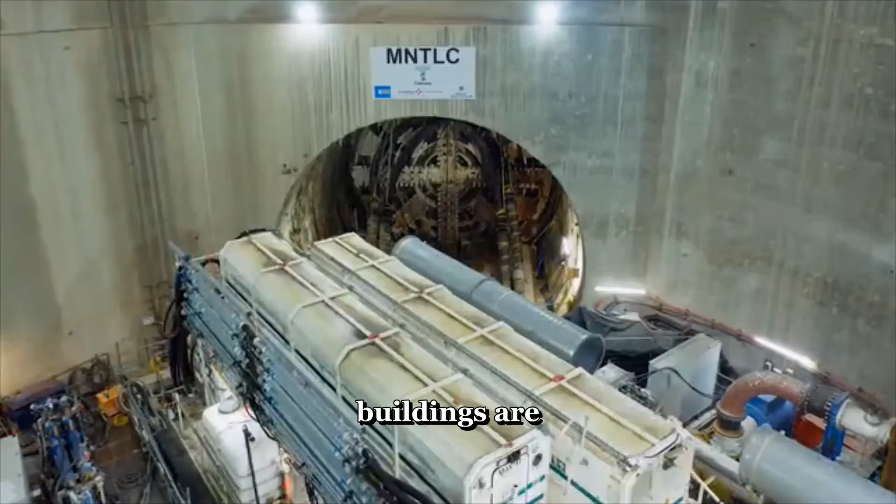Right now, 78 meters below the surface of the East China Sea, two machines the size of apartment buildings are eating their way toward each other through solid rock. They have been digging for months. One started from the mainland side, the other started from an island. They are grinding through granite, clay, and sand in complete darkness, under water pressure strong enough to crush a car, guided by satellites orbiting 20,000 kilometers above their heads.

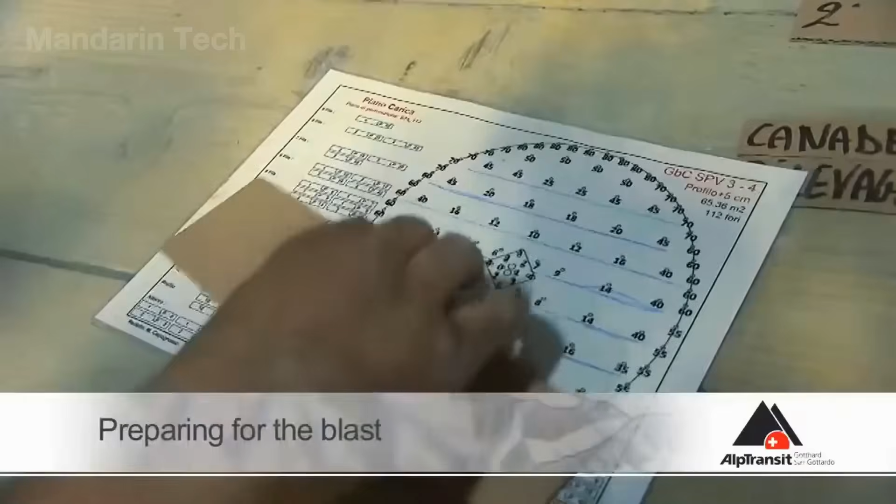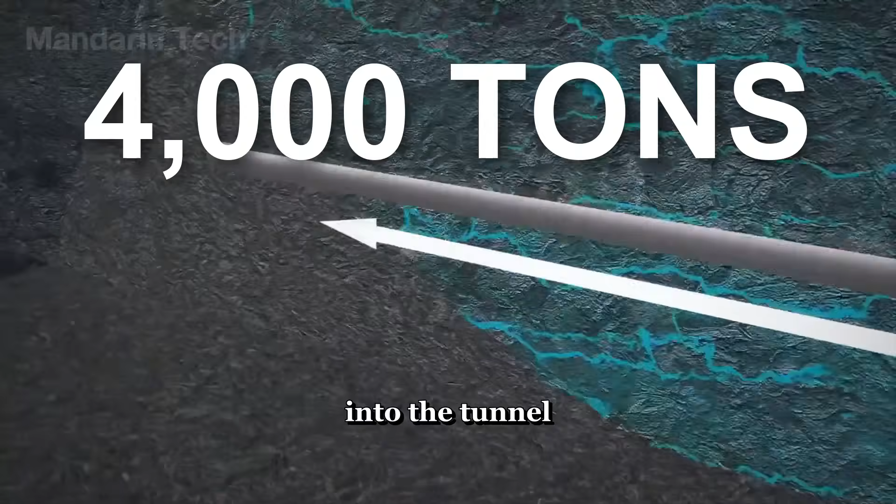When they meet somewhere in the middle, deep under the ocean floor, engineers will celebrate. And then they will do something that sounds insane. They will take the machines apart from the inside, remove every component they can carry, and leave the rest down there, forever. The outer shells of these 4,000-ton machines will be sealed into the tunnel walls. They will never be brought back to the surface. They will never be used again.

They will sit under the ocean for 100 years, holding back the weight of the sea, becoming a permanent part of the structure they built. Two machines sent down to do a job they cannot come back from. That is not a metaphor. That is the engineering plan.

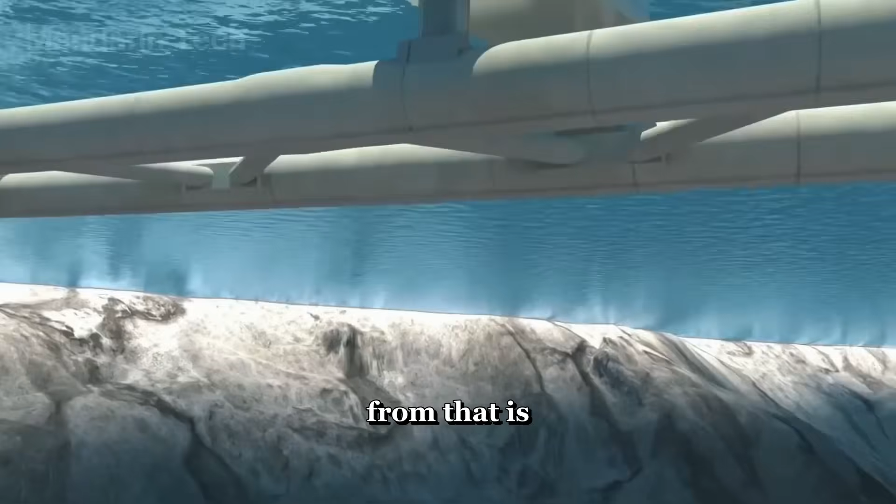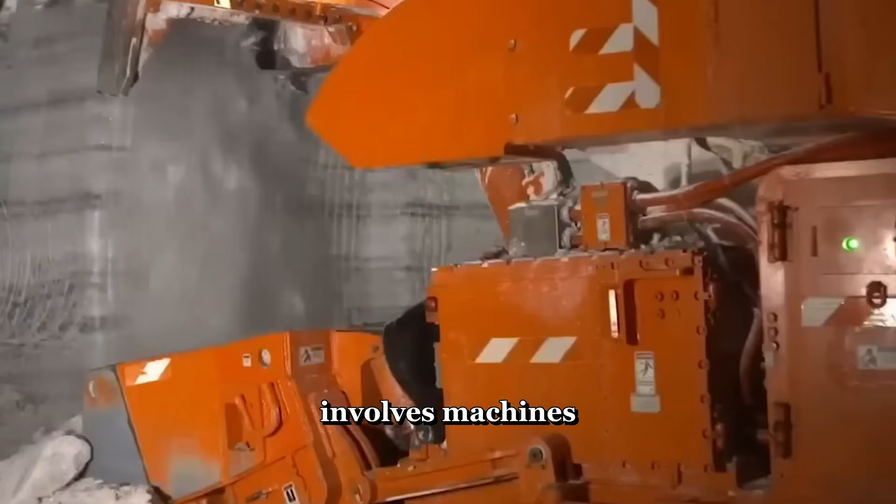This story involves machines that eat rock, satellites in space, and a meeting point so precise it would make a brain surgeon nervous. To understand why China is building a high-speed rail tunnel under the ocean, you need to understand what life is like on the other side of the water. Zhoushan is a cluster of over 1,000 islands sitting off the eastern coast of China, near the city of Ningbo. If you have never heard of it, you are not alone. Most people outside China have no idea it exists, but the people who live there know exactly what makes it special and exactly what makes it frustrating.

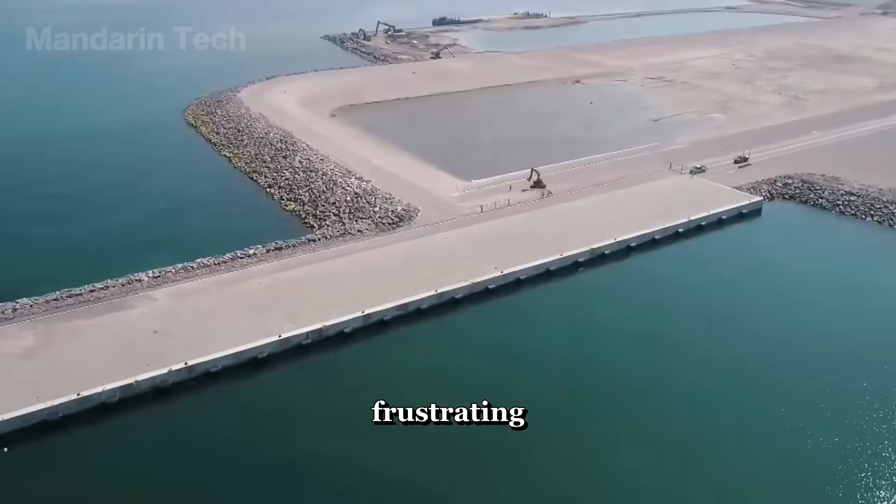The islands are beautiful, rocky coastlines, fishing villages that have operated for centuries, some of the freshest seafood markets in all of China. The area is also home to one of the biggest offshore petrochemical bases in the country, processing crude oil that arrives by tanker from the Middle East and Africa. Hundreds of thousands of people live and work on these islands. Millions more visit every year for the beaches, the temples, and the food.

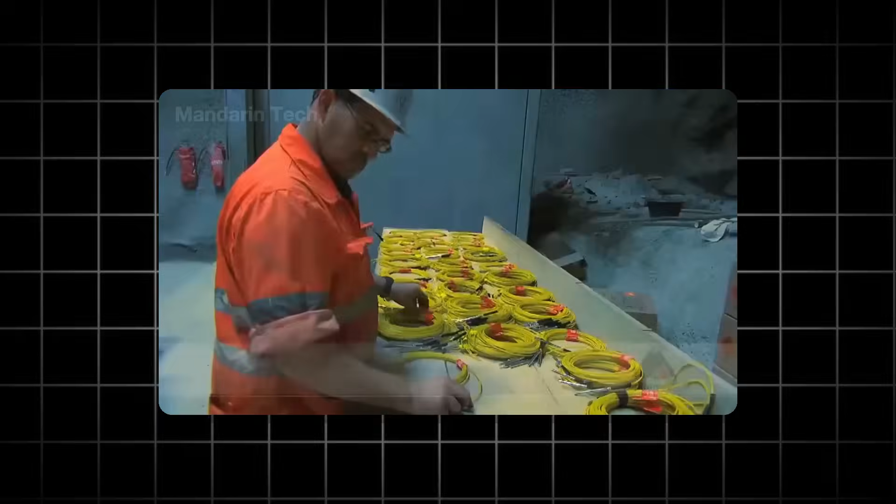The problem has always been the same. Getting there is miserable. For most of Zhoushan's history, the only way to reach the islands was by ferry. If the weather was good, the crossing took about an hour. If the weather was bad, and on the East China Sea the weather is bad often, the ferries stopped running entirely. People got stuck, cargo got delayed, businesses lost money. Hospital patients who needed treatment on the mainland had to wait for the waves to calm down.

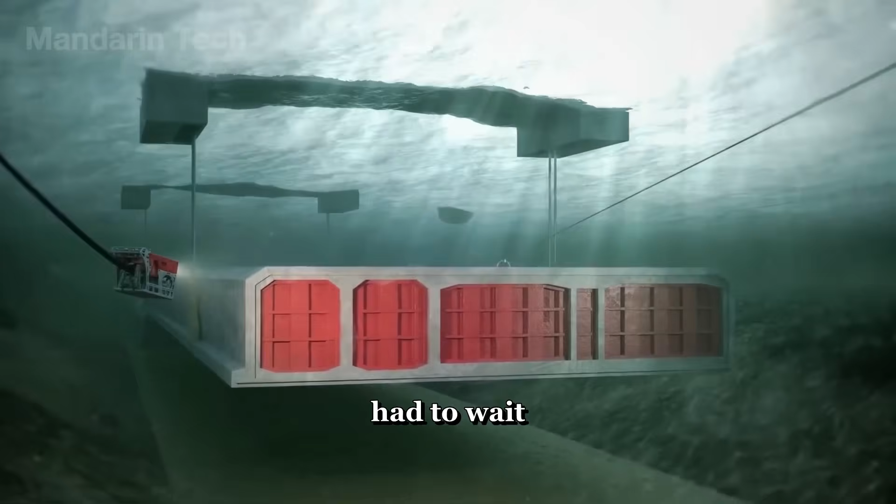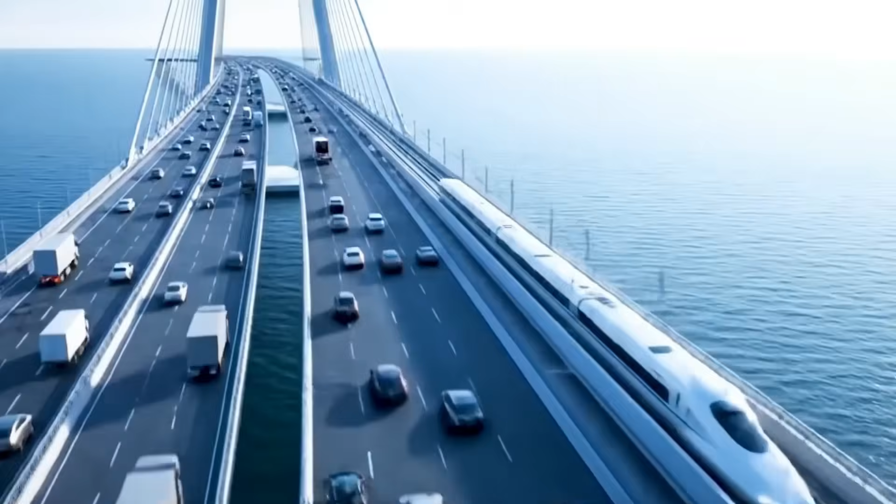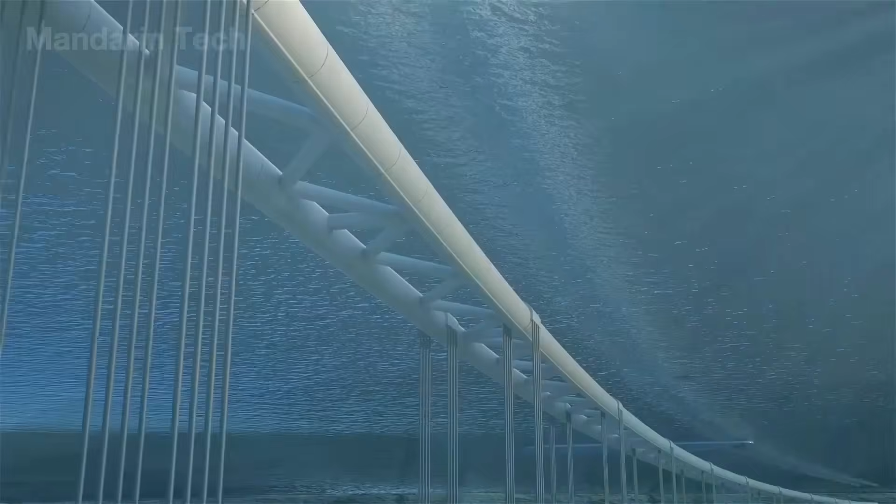In the 2000s, China built a series of bridges connecting some of the larger islands to the mainland. That helped, but it did not solve the problem. The bridges carry cars and trucks, not trains. Traffic jams during holidays turned a 90-minute drive into a 4 or 5 hour crawl, and the bridges could not reach the outermost islands because the water between them was too deep, the shipping lanes too busy, and the storms too frequent for conventional bridge construction.

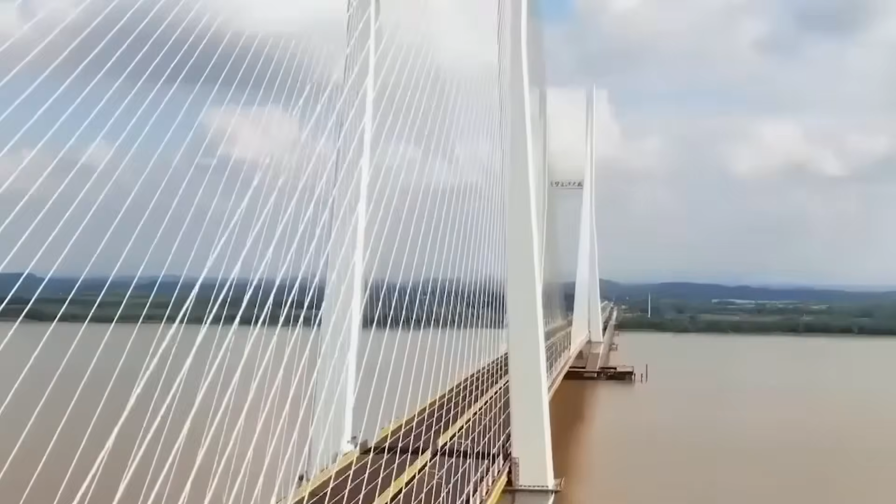China needed a way to get high-speed trains across the water. Not cars, not trucks. Trains moving at 250 kilometers per hour, carrying thousands of passengers a day, running on schedule regardless of weather. And the only way to do that across a busy shipping lane was to go under it. A bridge would block the massive cargo ships that pass through this stretch of water constantly. These ships are so tall that any bridge crossing would have to be built impossibly high to let them underneath. And a bridge at that height, exposed to the typhoons that hit the East China coast every year, would be an engineering nightmare and a safety risk.

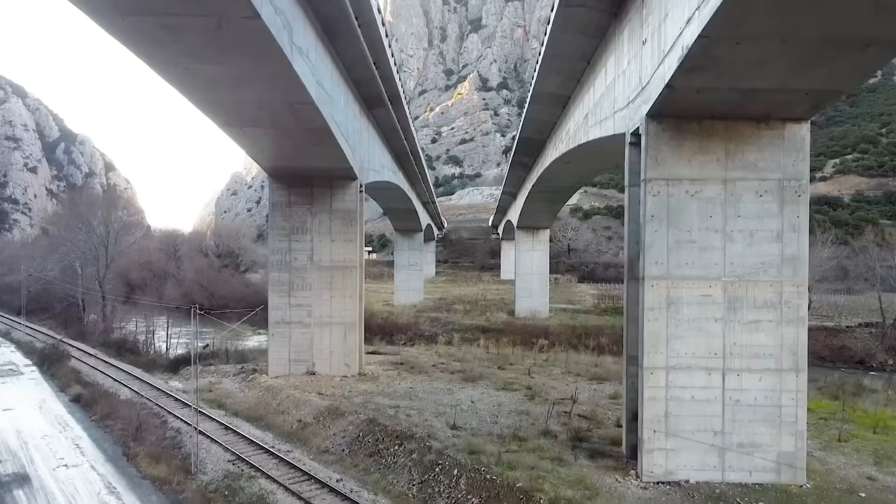A tunnel solves everything. It goes under the ships, under the waves, under the storms. Nothing on the surface can touch it. But a tunnel under the ocean is not like a tunnel through a mountain. A mountain is solid rock. It is stable, it is predictable. An ocean floor is a mess.

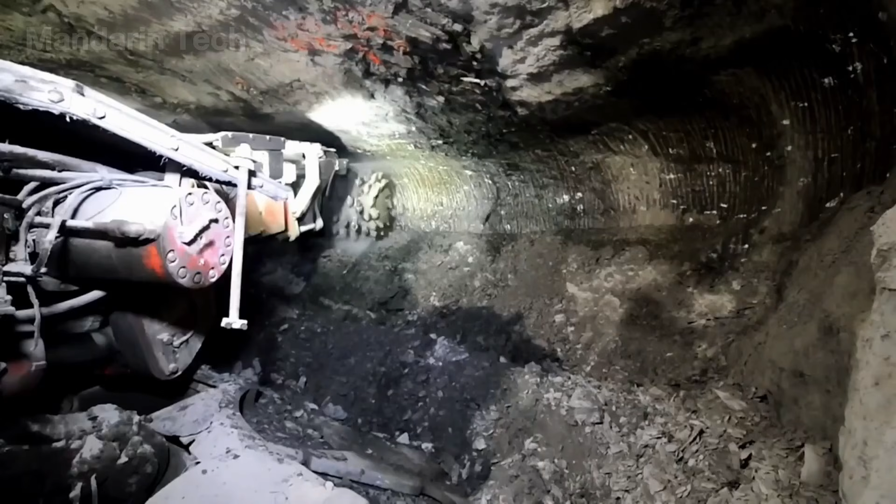Layers of granite mixed with clay, mixed with sand, mixed with silt. All of it saturated with salt water under crushing pressure. The ground changes composition every few hundred meters. What works for digging through granite does not work for clay. What works for clay will fail catastrophically in sand. And if water breaks through at any point during construction, people die.

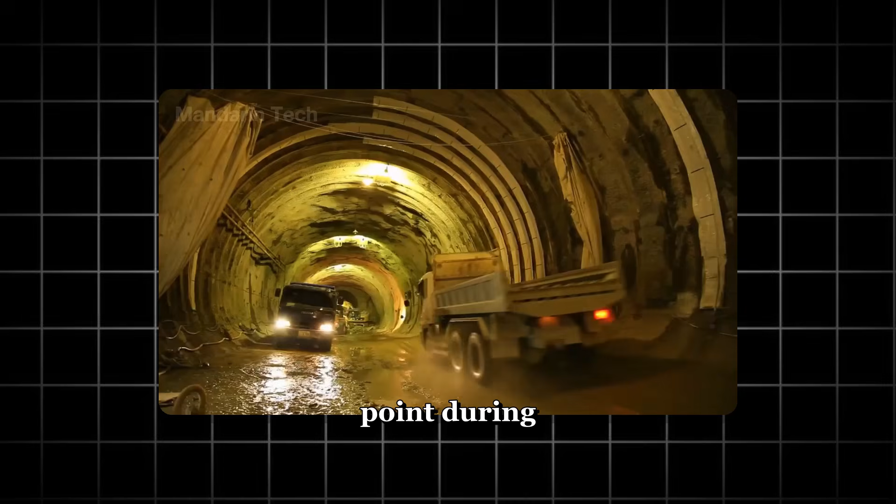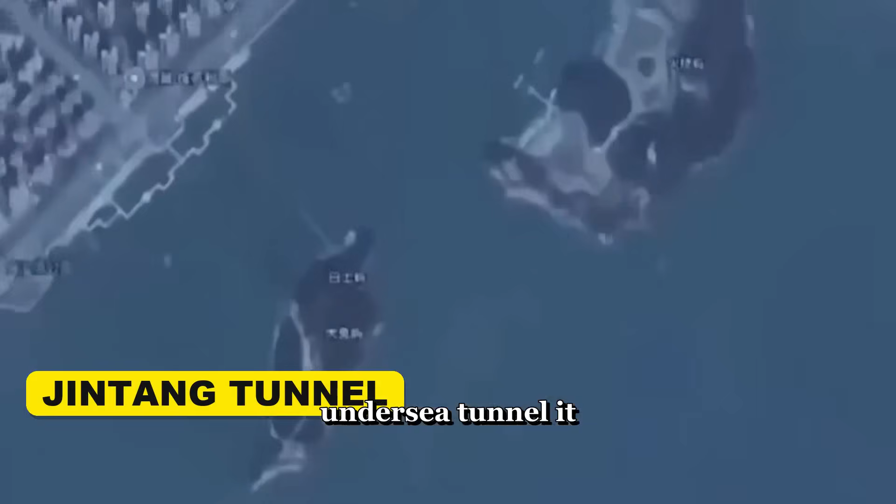This is the kind of project that most countries would study for a decade before even starting. China started digging. The tunnel is called the Jintang Undersea Tunnel. It stretches 16 kilometers from the mainland near Ningbo to the island of Jintang, the first major island in the Zhoushan chain. More than 11 of those kilometers run directly beneath the seabed.

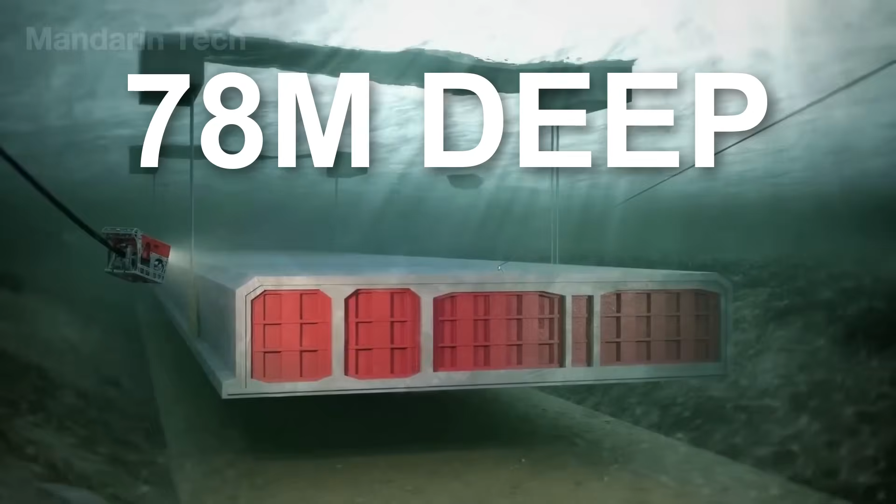The deepest point sits 78 meters below the ocean surface. To put that in physical terms, if you stacked a 25-story building on the ocean floor, the water would still cover the roof. That is how deep these machines are working. The machines themselves deserve their own chapter in the history of engineering. But since this is not a textbook, let me just tell you what it feels like to stand next to one. The first machine is named Dinghai.

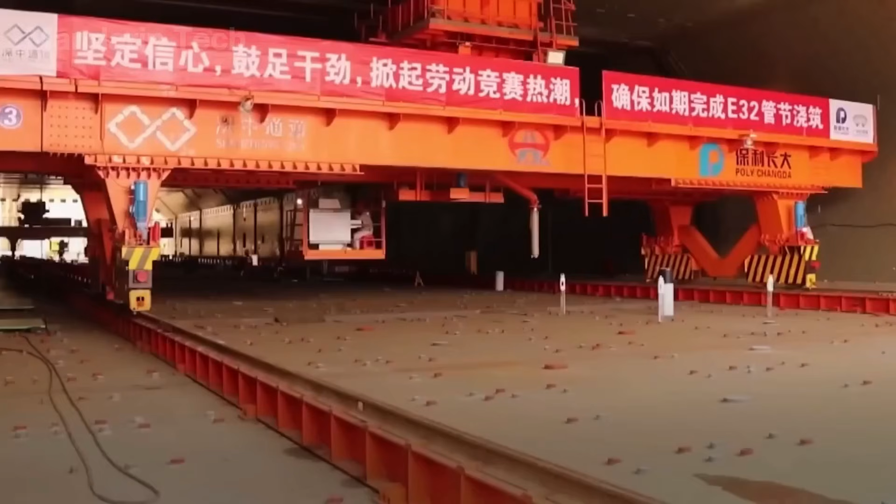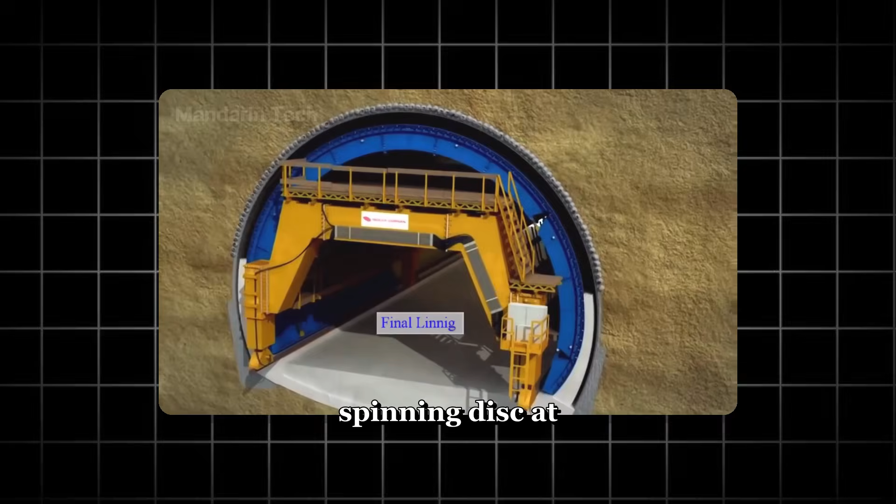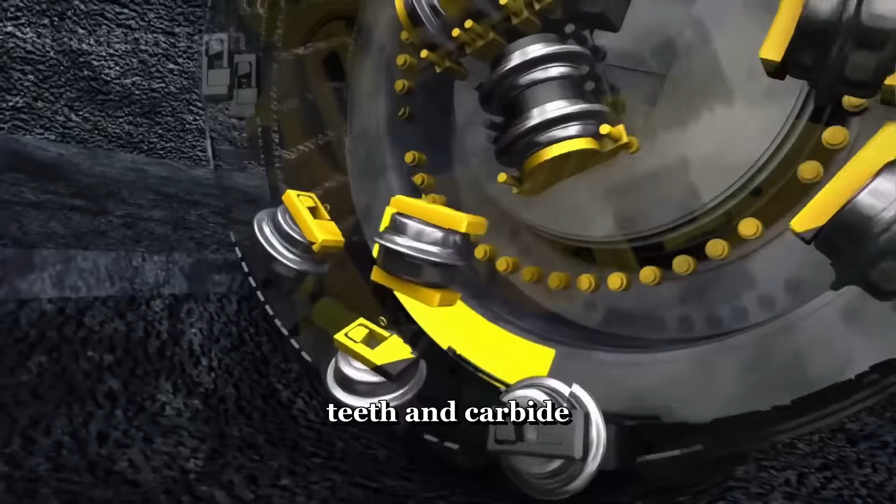The second is named Yongzhou. Each one is approximately 150 meters long. That is half the length of the Eiffel Tower, laid on its side and shoved into a hole in the ground. The cutter head, the spinning disc at the front that actually does the digging, is nearly 15 meters in diameter. Imagine a circular saw the size of a 5-story building, covered in hardened steel teeth and carbide cutters, spinning with enough torque to grind solid granite into gravel.

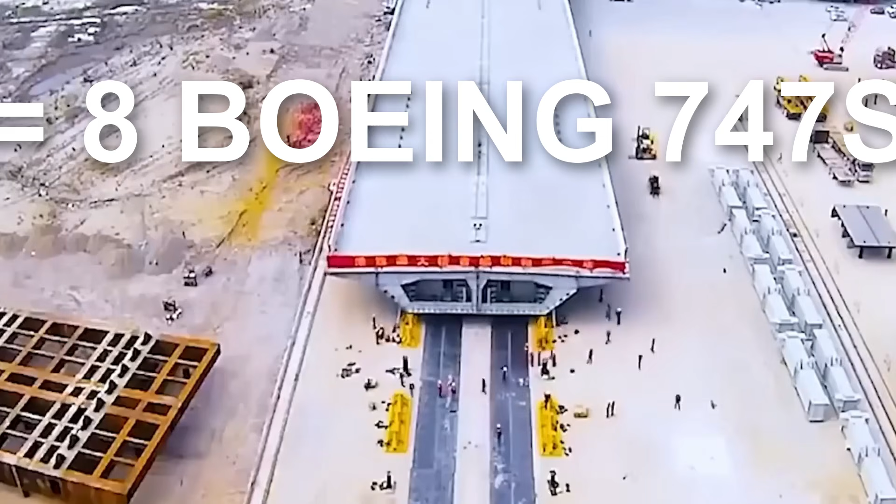Each machine weighs roughly 4,000 tons. That is the same as about 8 fully loaded Boeing 747 aircraft. These machines do not just dig, they build the tunnel behind them as they move forward. As the cutter head grinds through rock and soil, the excavated material is carried backward on conveyor belts and removed through the finished section of the tunnel. At the same time, automated systems inside the machine lift precast concrete ring segments into position and lock them together to form the tunnel walls.

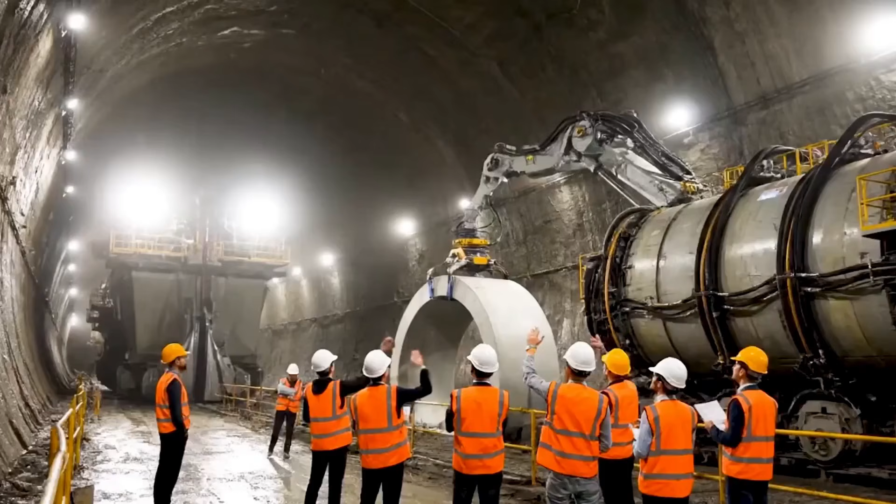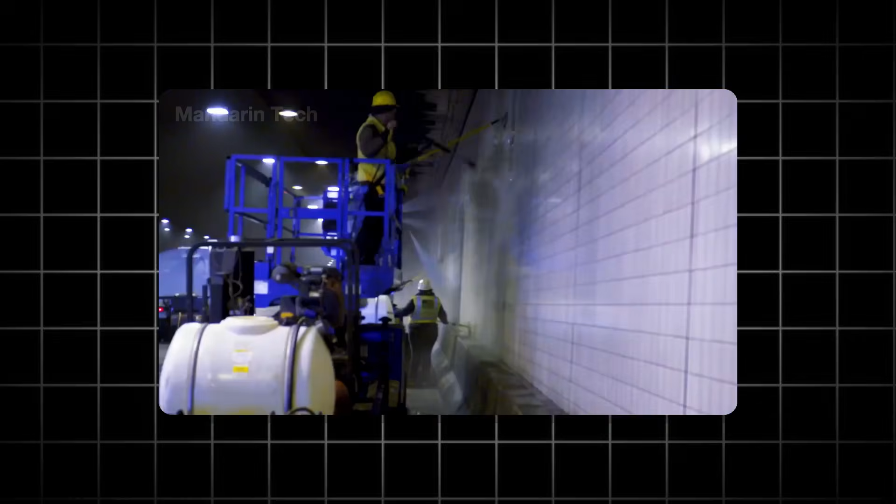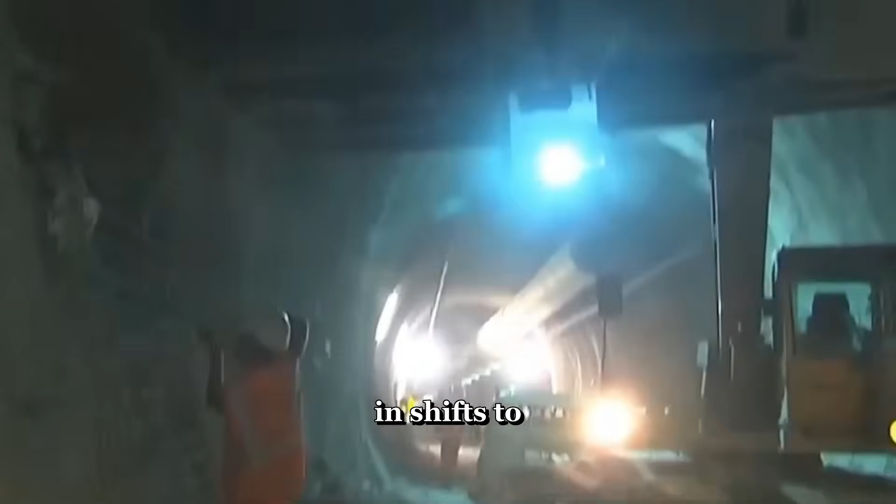Each ring weighs several tons. They are manufactured in a factory on the surface, transported down into the tunnel on rail cars, and installed by hydraulic arms inside the machine. The tunnel is literally being constructed in real time, a few meters behind the cutting face, while the machine advances. Then the machine injects pressurized grout into the gap between the concrete rings and the surrounding rock to seal everything watertight. All of this happens simultaneously, continuously, around the clock, with crews working in shifts to keep the machine fed with segments, power, and ventilation.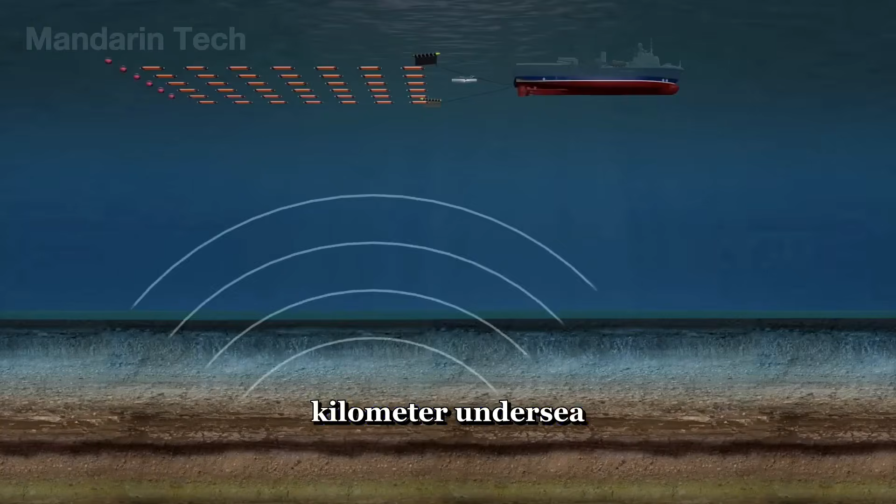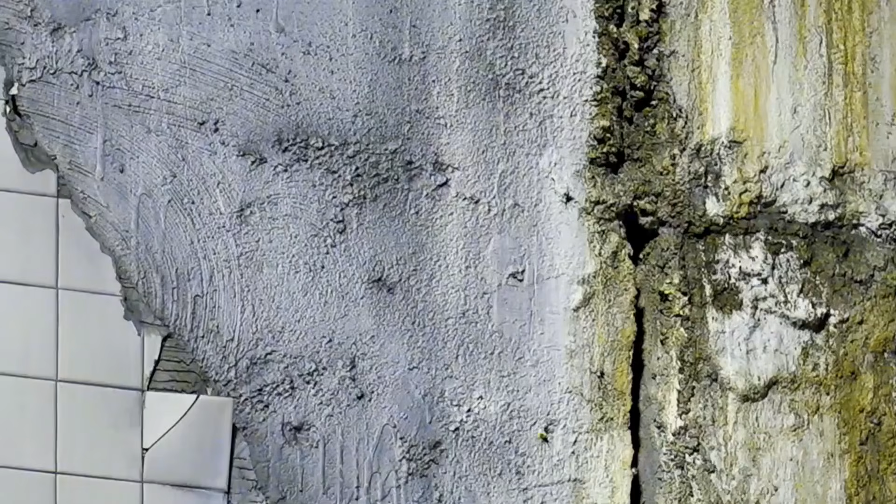Now here is where the challenge becomes genuinely terrifying. The ground along the tunnel route is not consistent. Over the 11-kilometer undersea stretch, the machines encounter 28 separate geological transitions. 28 times, the ground changes from one type of material to another. Hard granite gives way to soft clay. Clay gives way to sandy silt. Sandy silt gives way to something else entirely. Each transition requires the operators to adjust the boring speed, the face pressure, and the cutting technique in real time.

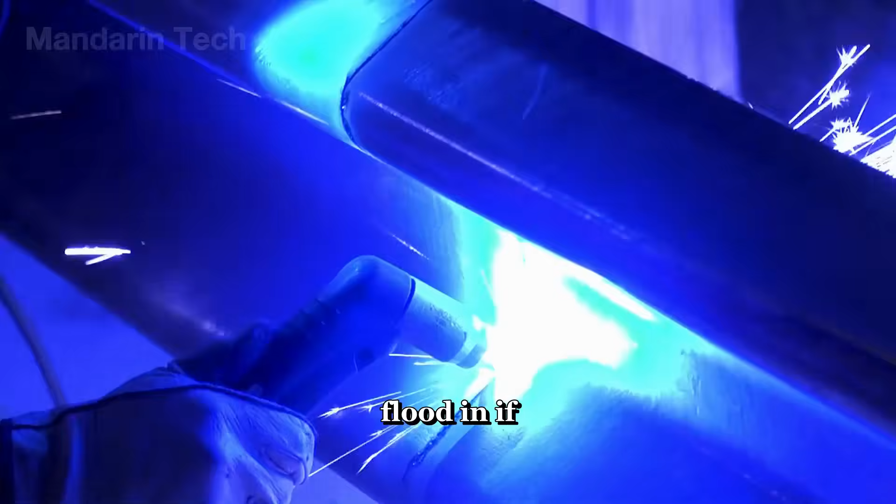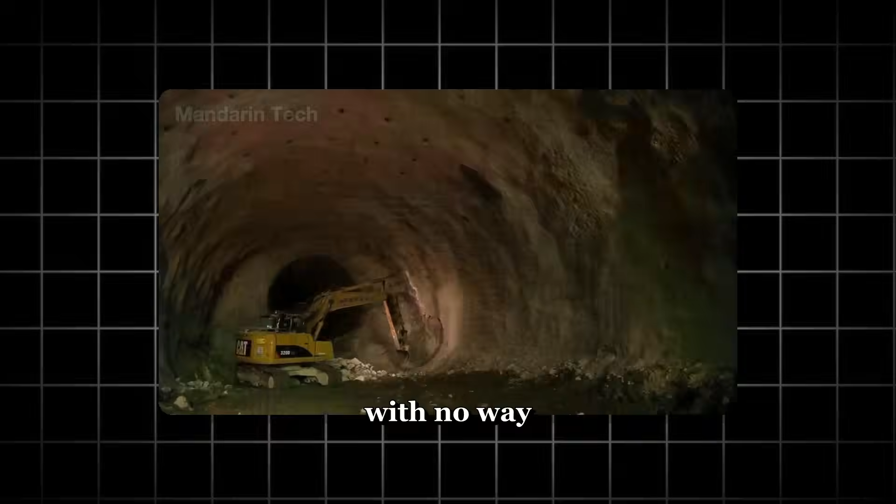If they push too hard into soft ground, the tunnel face can collapse, allowing water to flood in. If they push too slowly through hard rock, the cutter teeth overheat and the machine can jam. Getting stuck with 4,000 tons of machine, 78 meters under the ocean, with no way to reverse, is the kind of scenario that keeps tunnel engineers awake at night.

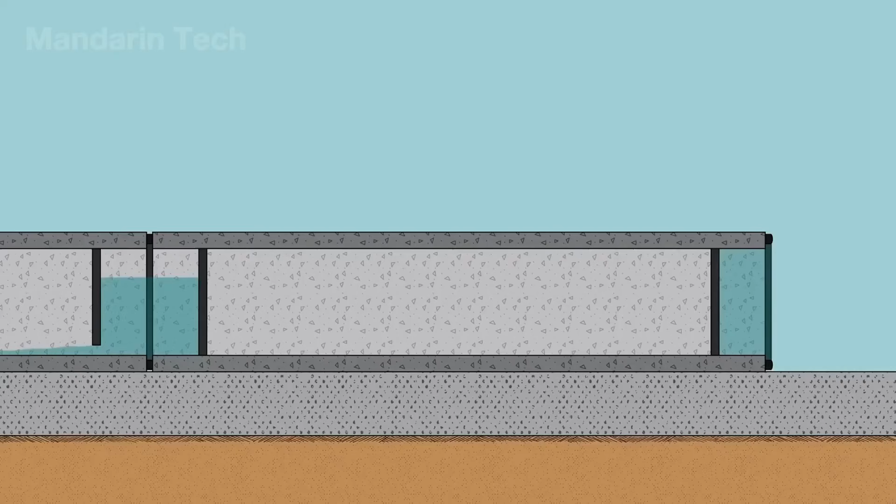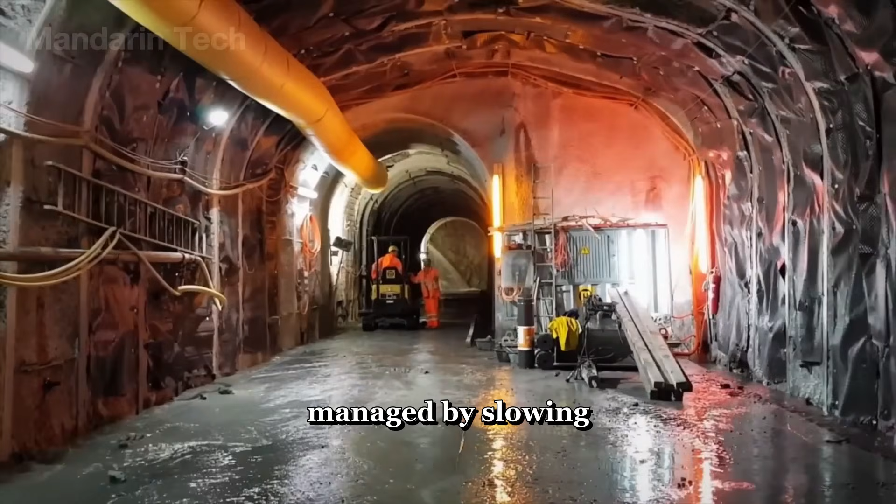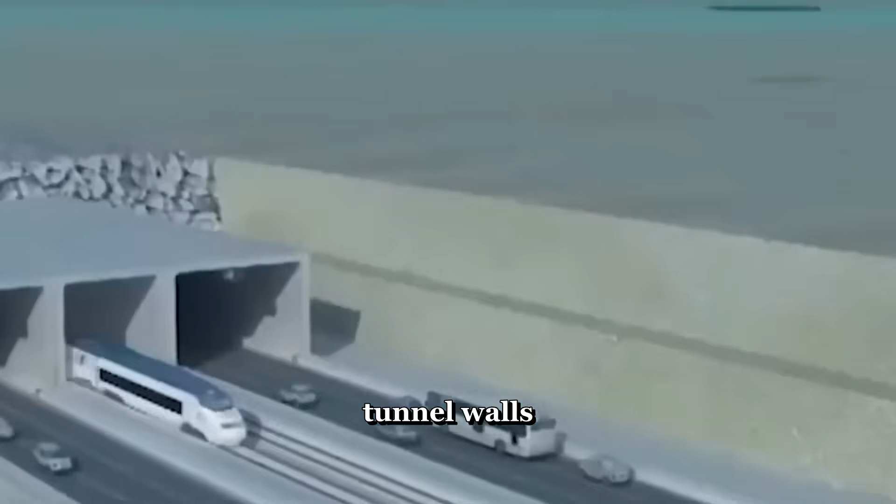There is a specific geological formation along the route that engineers flagged as the most dangerous section, a zone where the ground transitions from hard weathered granite directly into water-saturated sandy silt within the space of a few meters. In normal tunnel construction on land, this kind of transition is managed by slowing down and reinforcing the face before proceeding. Under the ocean, at 78 meters of depth, with the full weight of the sea pressing against every square centimeter of the tunnel walls, the margin for error shrinks to almost nothing.

One miscalculation in face pressure during that transition, and the sand liquefies. The water rushes in, and the machine floods. That is not a hypothetical scenario. It has happened on other tunnel projects around the world.

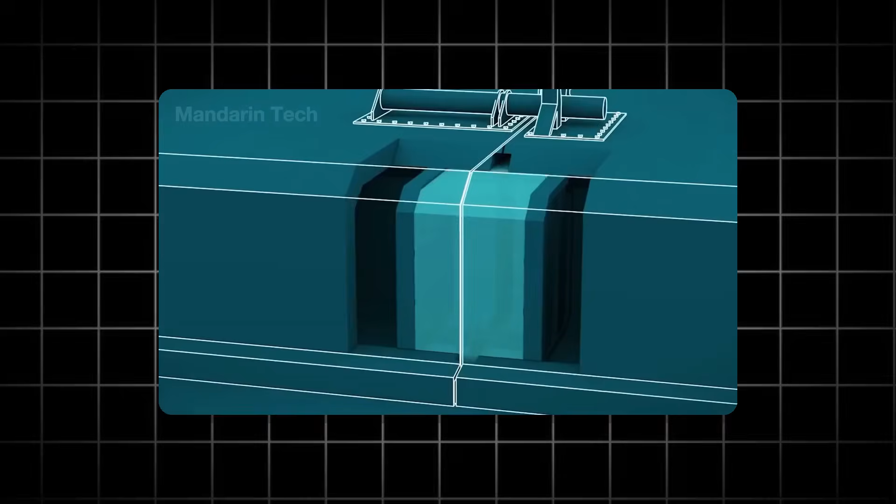The difference here is that you cannot evacuate workers quickly from a machine that is 6 kilometers into a hole under the ocean. The operators inside the control room monitor dozens of sensors simultaneously. Ground pressure sensors, water inflow meters, torque readings on the cutter head, temperature gauges on the bearings, vibration monitors on the drive motors. Each reading tells them something about what the machine is about to encounter.

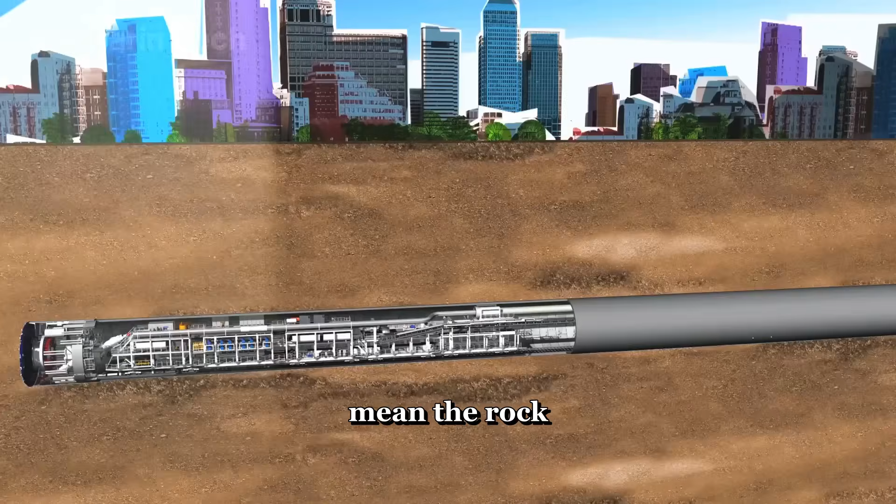A sudden drop in torque might mean the rock ahead is softer than expected. A rise in water inflow might mean there is a fissure in the rock that connects to the sea above. Reading these signals correctly and adjusting the machine's behavior in real time is what separates a successful bore from a catastrophe.

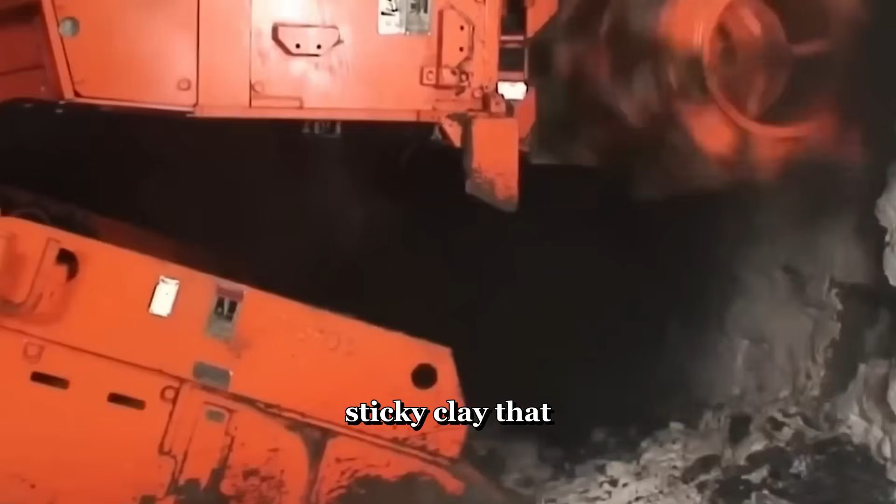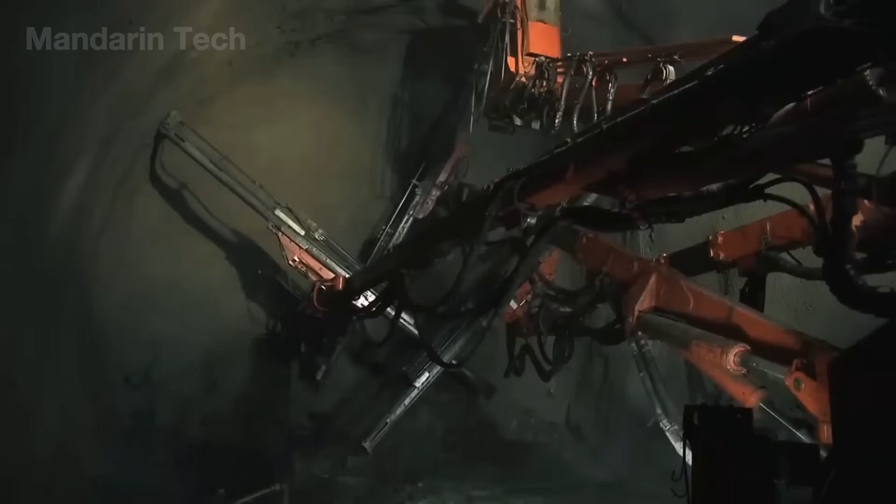Chinese engineers modified both machines specifically for this project. They added water injection systems to the cutter heads to handle sticky clay that could clog the blades. They reinforced every seal and gasket to withstand the water pressure at maximum depth. They upgraded the drive systems to run continuously for months without major maintenance. Because if a machine breaks down under the ocean, fixing it is not a matter of calling a mechanic. It is a full-scale engineering operation that can delay the project by weeks.

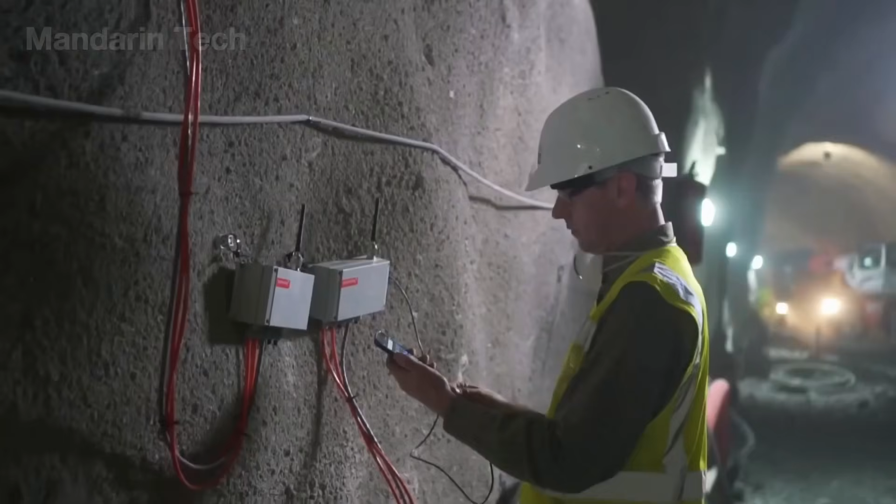But the machines and the geology are not even the hardest part. The hardest part is making sure these two monsters actually find each other. Dinghai started digging from the Zhoushan side, heading toward the mainland. It has to bore over 6,000 meters. Yongzhou started from the Ningbo side, heading toward the island. It has to cover nearly 5,000 meters. Somewhere in the middle,

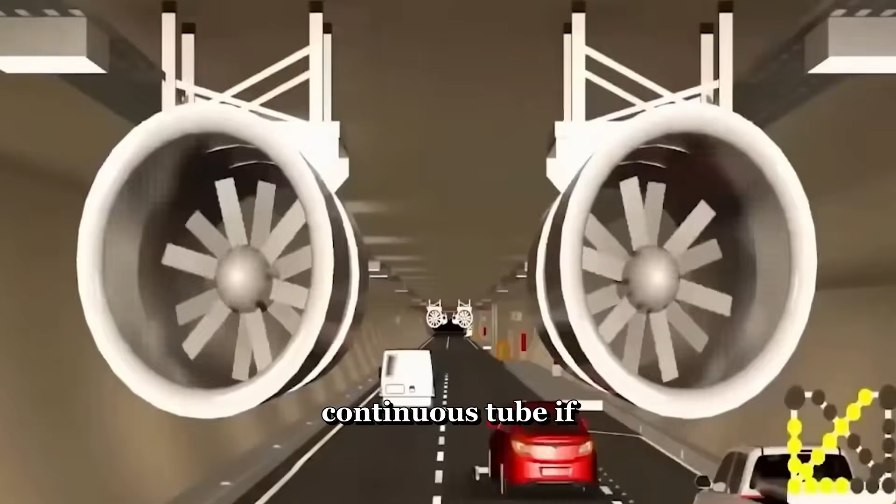deep under the seabed, in complete darkness, surrounded by rock and pressurized water, these two machines are supposed to meet. Not roughly, not approximately. They have to align with each other precisely enough that the tunnel forms one continuous tube. If they miss by even a few meters, the entire project fails. You would have two separate holes under the ocean that go nowhere. Billions of dollars and years of work wasted on the most expensive mistake in engineering history.

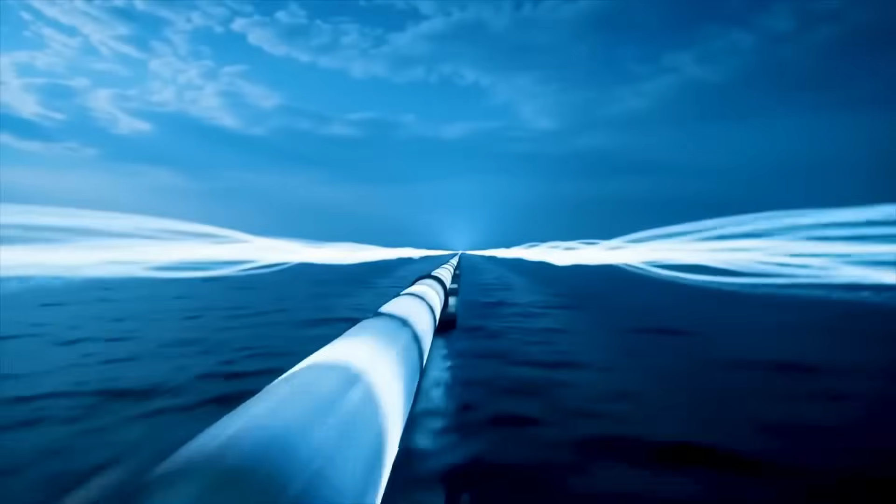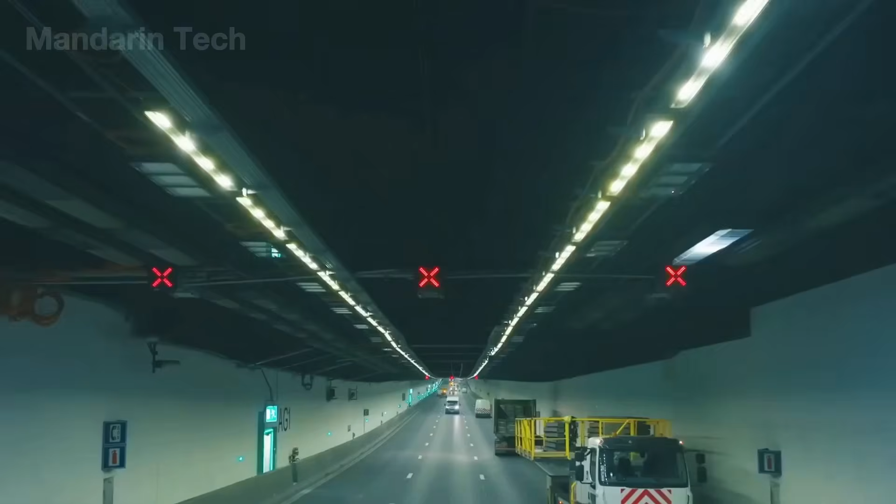So how do you guide a 4,000-ton machine through 11 kilometers of rock in the dark and hit a target the size of a room? You use satellites. Specifically, China deployed 6 Beidou navigation satellites for this project. Beidou is China's own global positioning system, the same one we talked about in a previous video that is now more accurate than America's GPS. Normal satellite positioning is accurate to within a few meters. That is fine for driving directions. It is completely useless for connecting two tunnel boring machines under the ocean.

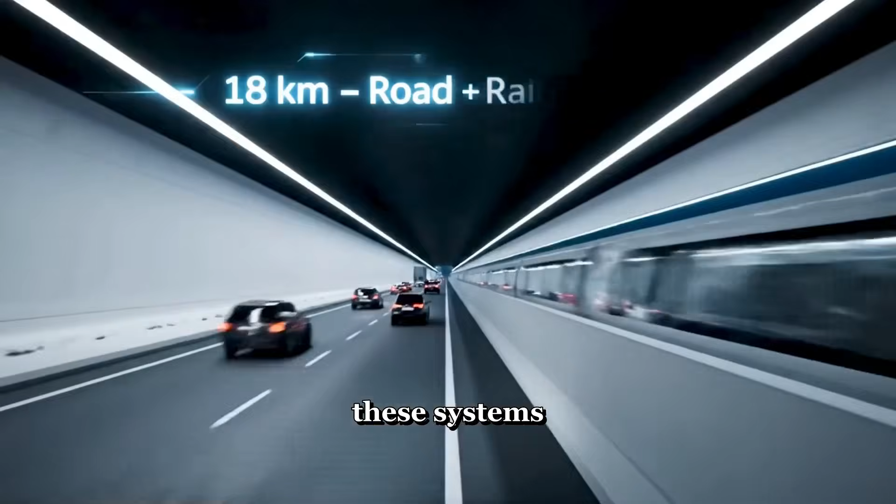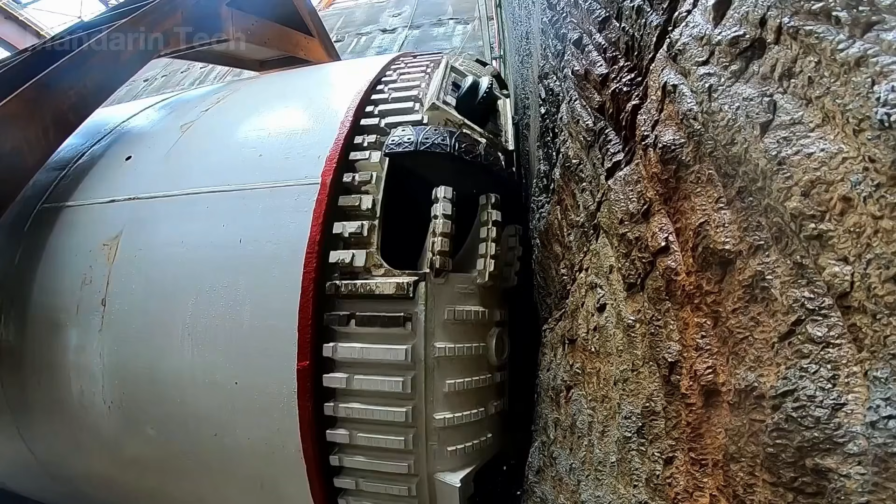So the engineers linked the Beidou satellites directly to the auto-navigation systems built into both machines. These systems track each machine's position in 3 dimensions, latitude, longitude, and depth, and compare it to the planned route hundreds of times per second. When the machine drifts even a fraction off course, the system sends corrections to the steering mechanisms, adjusting the angle of the cutter head in real time. The machine corrects its own course as it digs. It is like a self-driving car, except it weighs 4,000 tons and is boring through granite under the ocean.

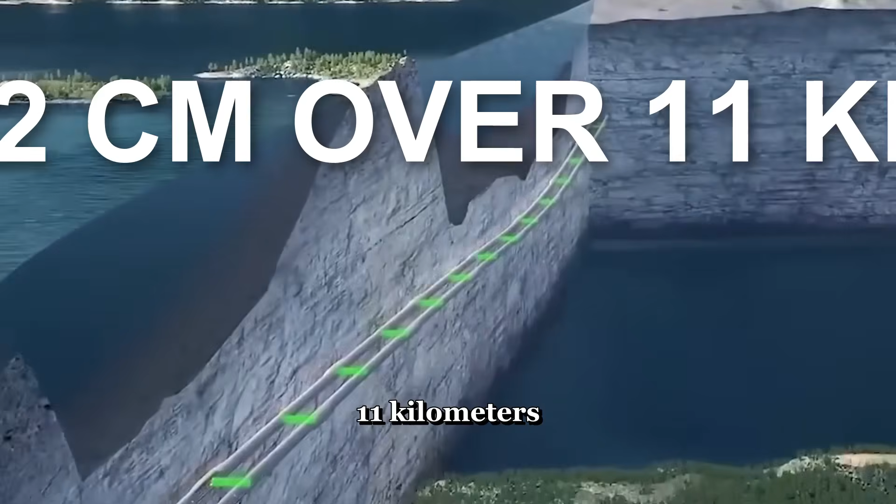When Dingkai and Yongzhou finally met beneath the seabed, the alignment error between them was less than 2 centimeters. 2 centimeters over 11 kilometers. That is the equivalent of threading a needle from one end of a football field to the other. The precision is almost impossible to believe until you realize that without it, the tunnel simply would not work.

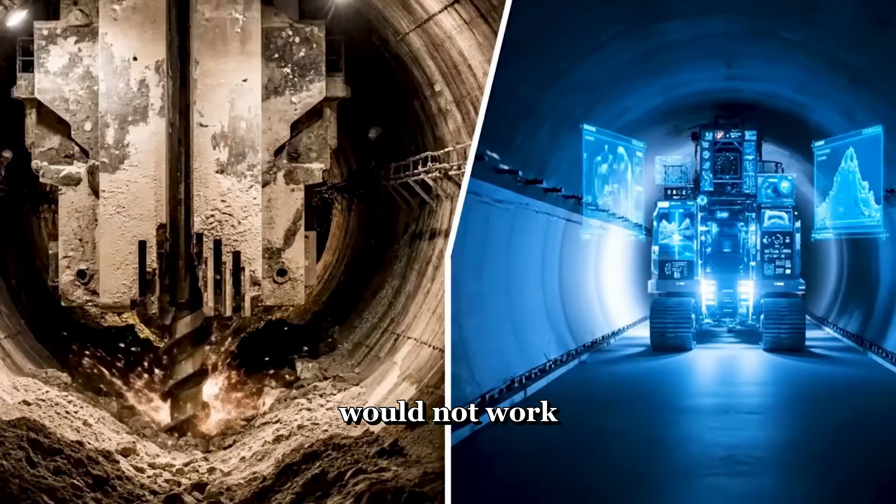And then came the part that nobody talks about. The machines are done, the tunnel is bored, everybody celebrates. But now, there is a problem. These 4,000-ton machines are stuck. They cannot keep digging forward because there is no forward. They just met the other machine. They cannot back up because the tunnel they built is full of concrete rings, rail cars, equipment, and workers.

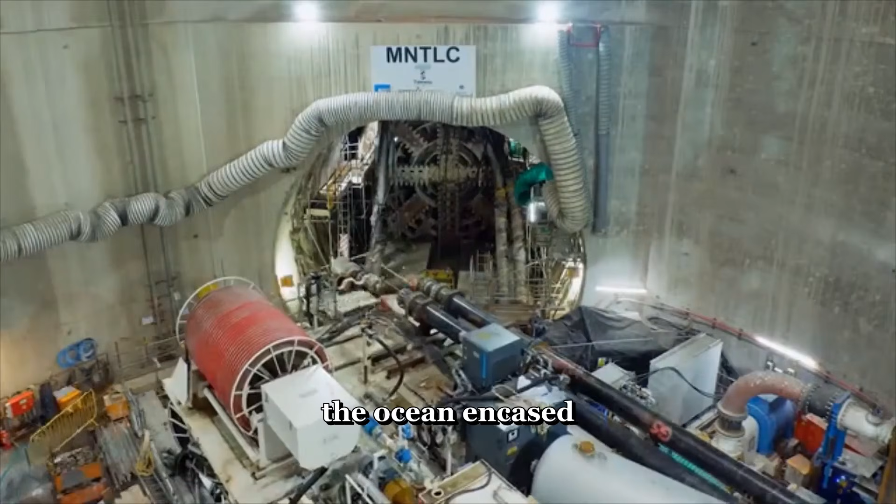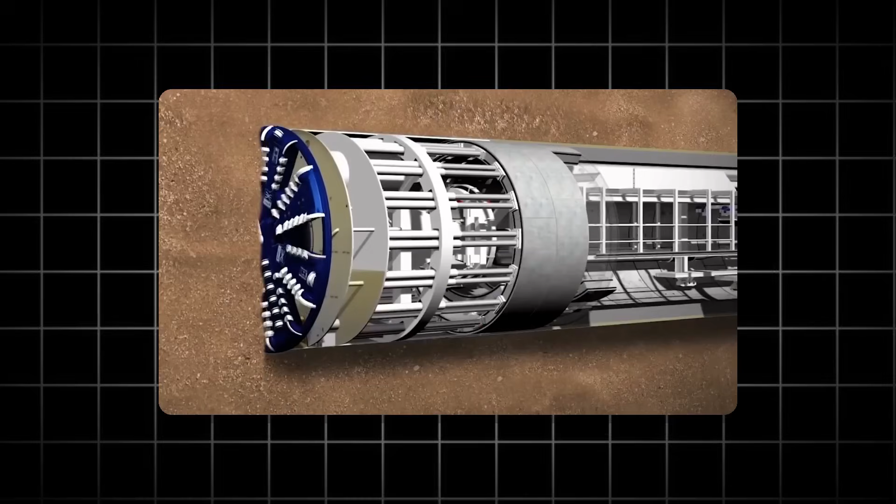And they absolutely cannot be lifted out because they are 78 meters below the ocean, encased in rock, and weigh 4,000 tons each. So what do you do with a machine that has completed its mission but has no way out? You take it apart from the inside. Engineers call the process shedding the shell. Workers climb inside the machine and begin disassembling it piece by piece.

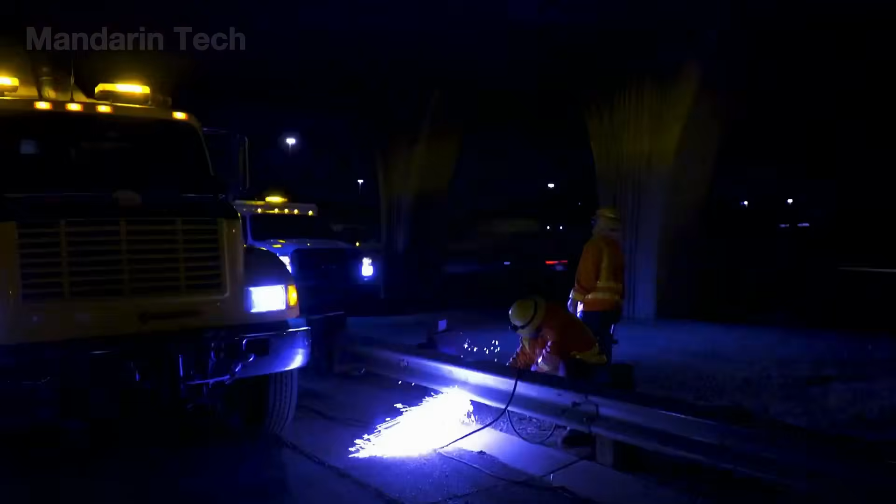The drive motors come out, the hydraulic systems come out. The cutter head, which alone weighs hundreds of tons, is cut into sections and hauled back through the tunnel on rail cars. Every component that is expensive or reusable is stripped out and saved for the next project. The work takes weeks. It is meticulous, difficult, and done in a space that was designed for a machine, not for people to work in comfortably.

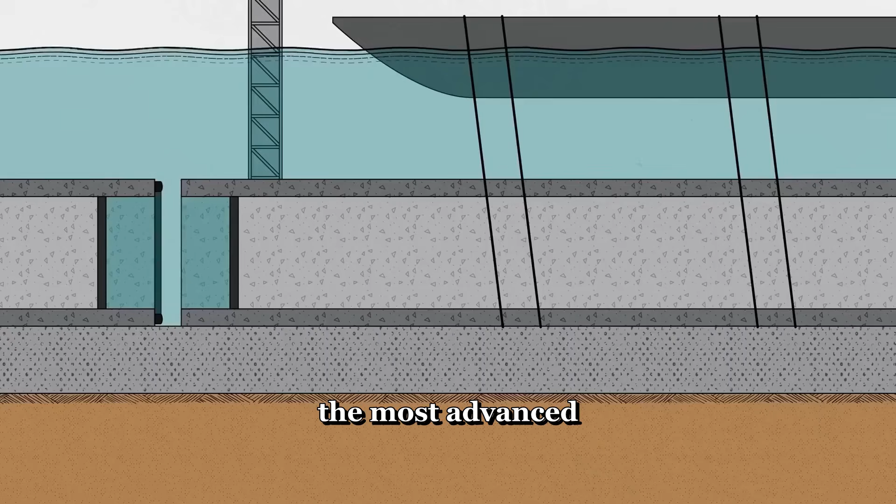When everything that can be removed has been removed, the outer steel shell of the machine stays. It remains embedded in the ground, sealed into the tunnel structure, becoming a permanent part of the wall. The shell that once housed one of the most advanced boring machines ever built becomes reinforcement against the pressure of the ocean above. These machines were designed to do one job and then cease to exist as machines. They were built to become infrastructure.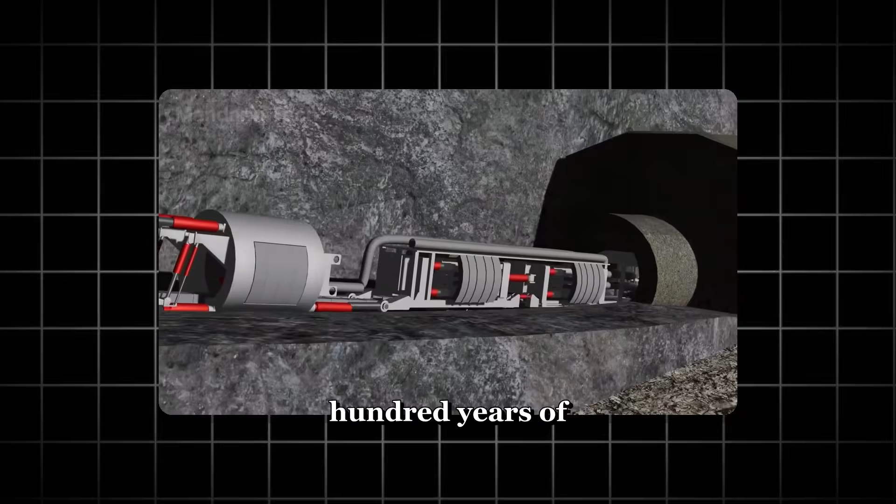Every component was planned with this end in mind. The shell thickness, the metallurgy, the corrosion resistance, all of it was specified not just for the boring phase, but for the 100 years of service that would follow. The machine does not just build the tunnel, it becomes the tunnel. There is something about that idea that goes beyond engineering.

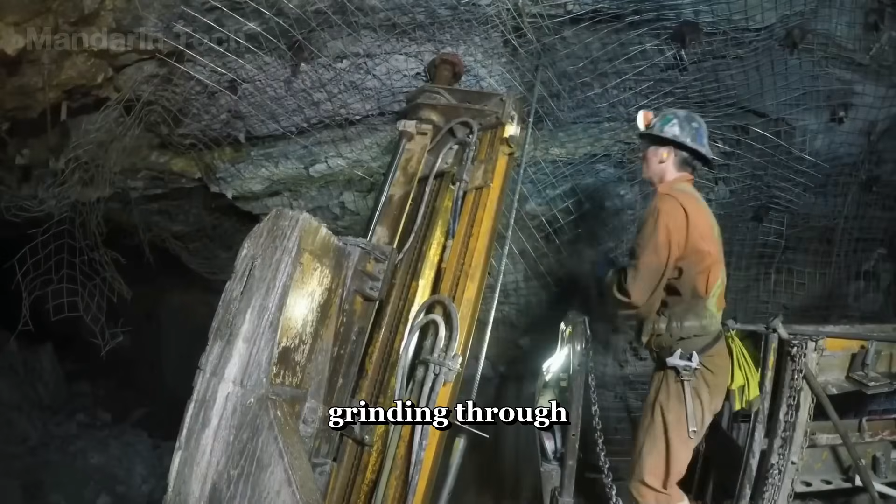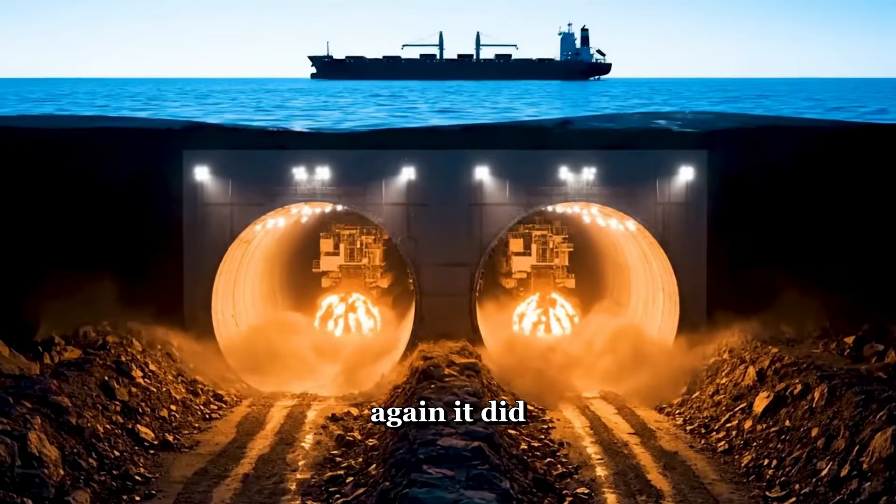A 4,000-ton machine that spends months grinding through rock in the dark, guided by satellites, correcting its own course centimeter by centimeter, and when it finally finishes, it is sealed inside its own creation and left there forever. It never comes back up. It never sees daylight again. It did exactly what it was built to do, and then it became part of the thing it made.

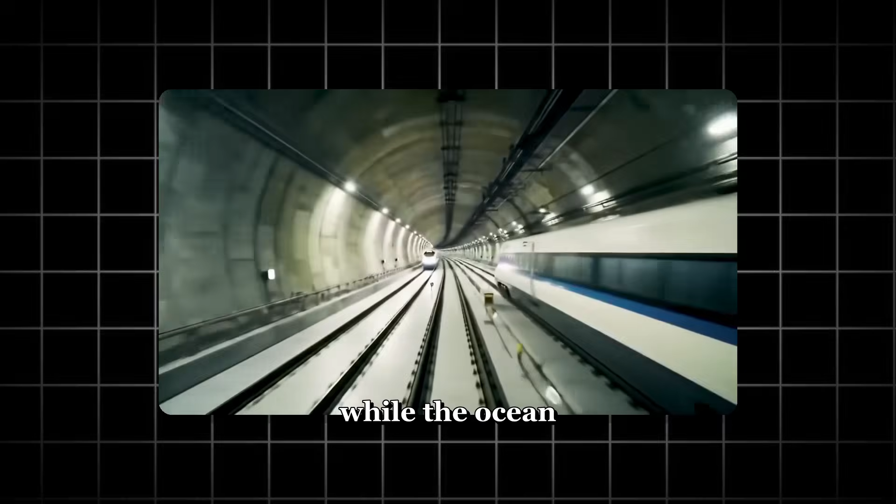The Jintang Tunnel is on track to be fully bored through by the end of 2026. After breakthrough, another year of finishing work follows. Track laying, electrical systems, ventilation, lighting, safety equipment, and all the systems that turn a hole in the ground into a functioning high-speed rail line. When it opens in 2028, the trip from Ningbo to Zhoushan will take 30 minutes instead of over an hour. Passengers will ride at 250 kilometers per hour in air-conditioned comfort, while the ocean sits silently above their heads.

But this tunnel is not just about connecting two cities. Engineers who have studied the project believe it is a rehearsal for something far more ambitious. The Taiwan Strait, the body of water separating mainland China from Taiwan, is about 130 kilometers wide at its narrowest point. That is roughly 8 times longer than the Jintang Tunnel. The water is deeper, the currents are stronger, and the geological conditions are more complex. A tunnel across the Taiwan Strait would be the most ambitious construction project in human history.

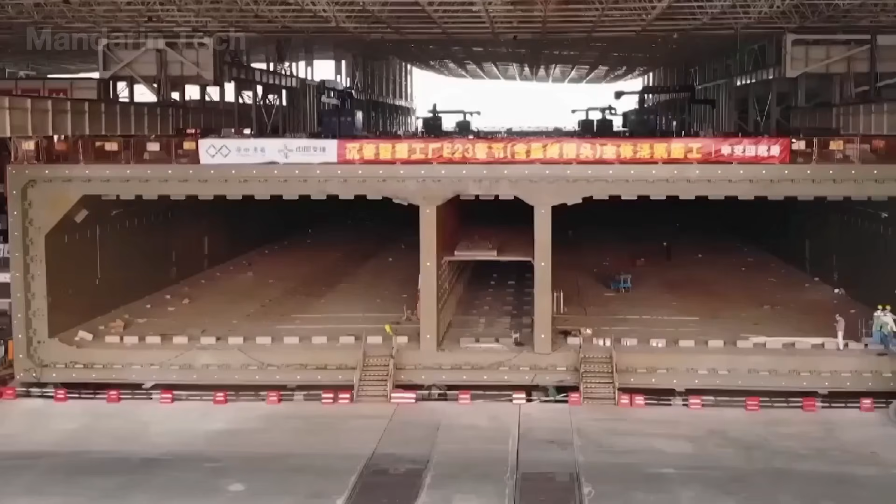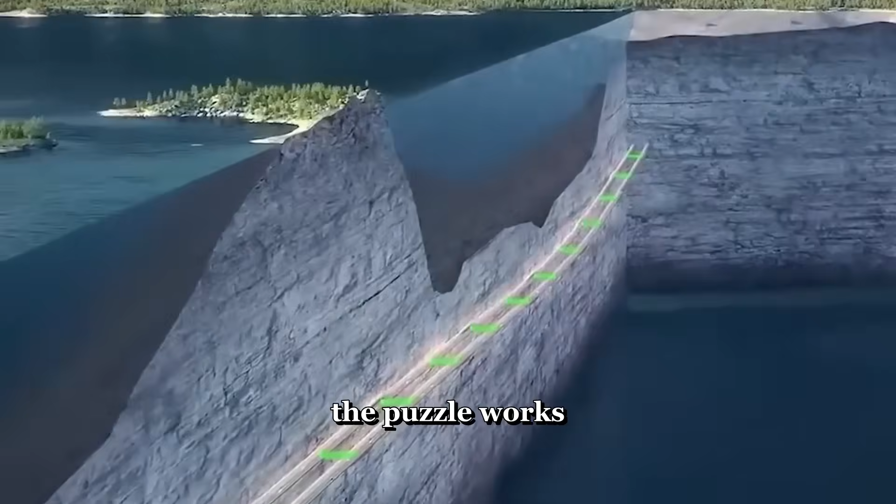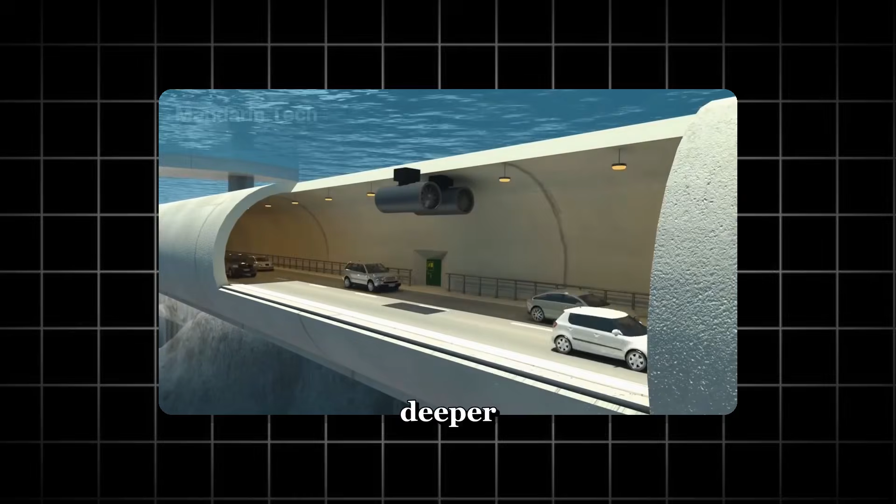Whether that tunnel ever gets built depends on politics and economics that go far beyond engineering. But from a purely technical standpoint, the Jintang Tunnel just proved that every piece of the puzzle works. The machines can bore through mixed geology under the ocean. The satellite guidance can achieve centimeter-level precision. The shell shedding technique can handle the machines after breakthrough. Every technology needed for a longer, deeper, more complex undersea tunnel has now been tested and validated under real conditions.

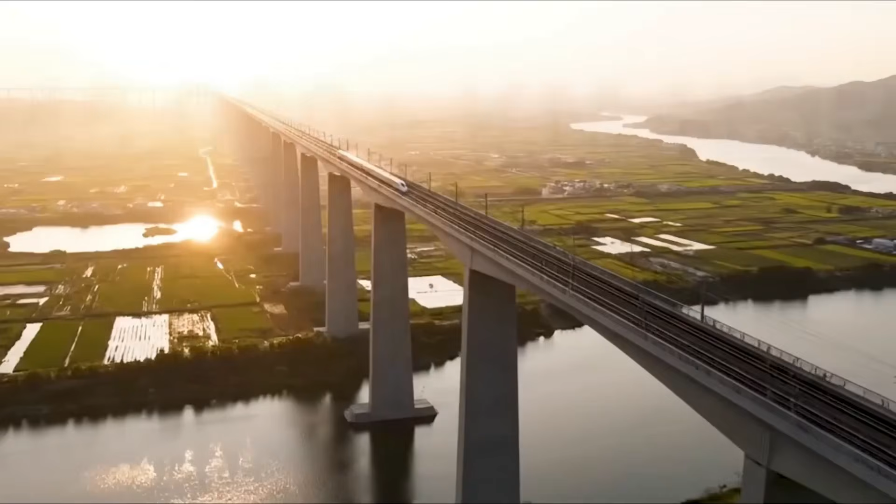China has already built more than 45,000 kilometers of high-speed rail, more than every other country in the world combined. They have mastered bridges, viaducts, mountain tunnels, and now ocean tunnels. Each project pushes the boundary of what is considered possible, and then the next project pushes it further.

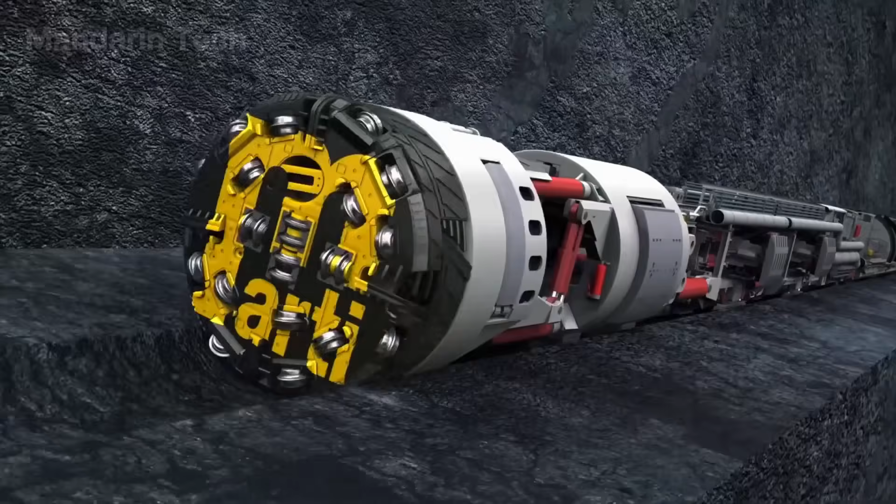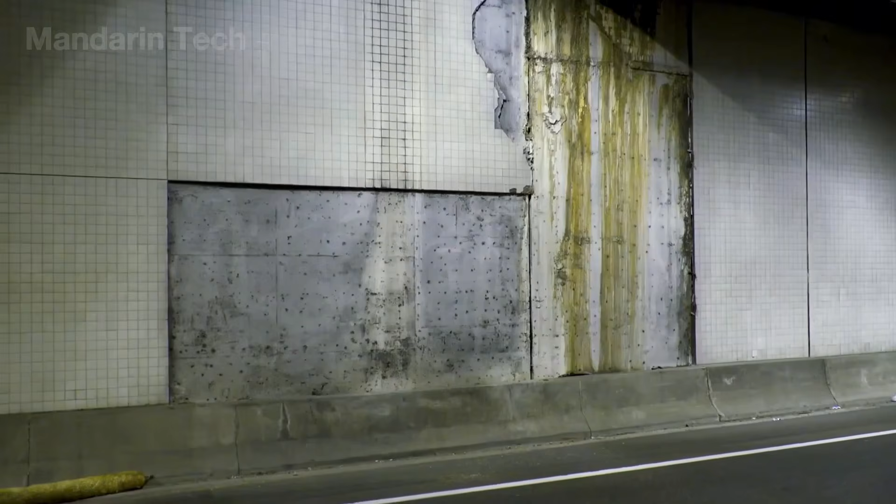2 machines are under the East China Sea right now. When they finish, they will be taken apart, stripped of their insides, and left in the dark under millions of tons of water and rock. They will hold the tunnel walls in place for 100 years. Nobody will ever see them again. And somewhere above them, passengers on a train will be scrolling through their phones, completely unaware of the machines buried beneath their feet that made the whole thing possible.